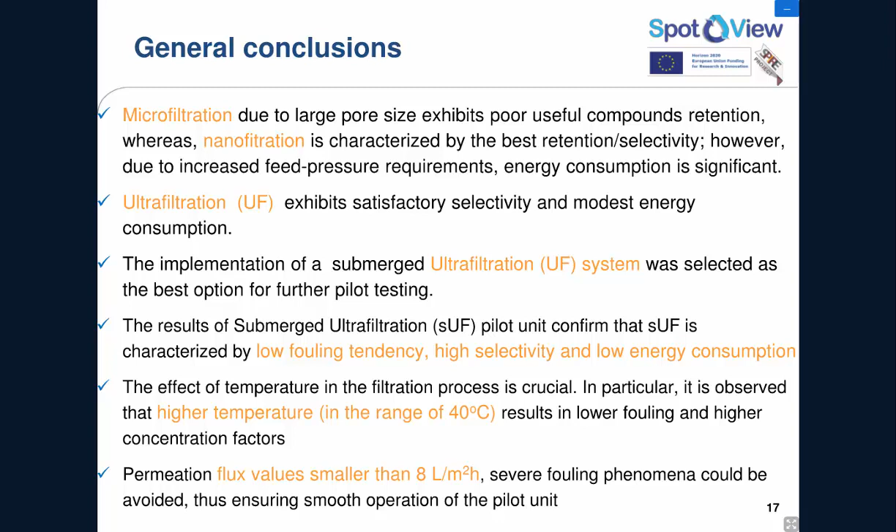Then we will go on with our very last presentation for today. Daniel Winter from the Fraunhofer Institute for Solar Energy Systems is presenting today the results, or probably some results, of the ReWaCEM project. As I said before, ReWaCEM is an abbreviation of recovery of acids and metals from pickling solutions of the metal processing industry. And as I said before, they were together with Inspire Water and SpotView in the SPIRE call, Water Management in Process Industry. So I'm really curious about what you have to present today, Daniel.

Hello and welcome everyone. I hope you can hear me. Yes, we can. Okay, great.

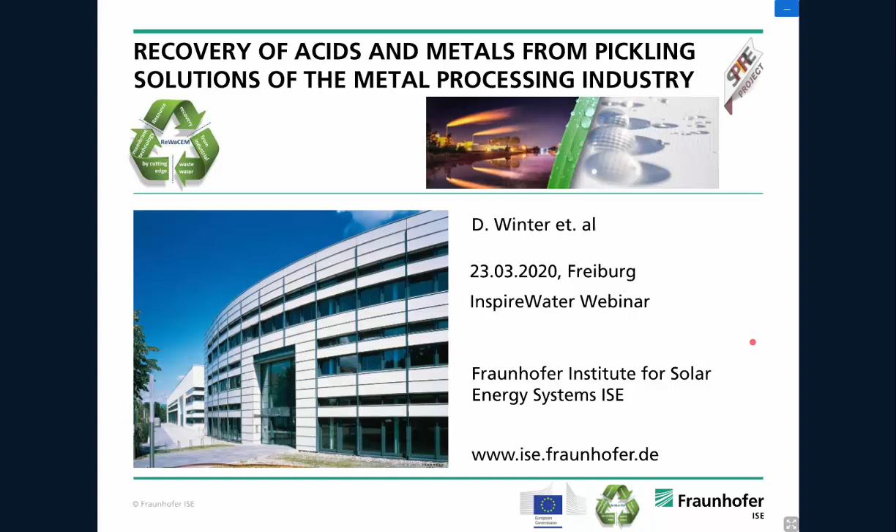So I'm going to start with the presentation, or let's say a small look into the project ReWaCEM, which we have done with a lot of project partners during the last 3.5 years, and we ended the project in 2019. I will just give a short introduction into the basic objective of the ReWaCEM project and share the consortium. I will then go through the different demonstration cases we had a look at during the project. I will select one and give a bit more detailed insight into it, and then summarize some outcome.

So going quickly over the consortium, we had 6 R&D institutes doing the research and the evaluation, and each of the institutes was linked to one of the showcases or one of the core technologies. Then there were 4 SMEs developing the core technologies, and 4 industry partners actually hosting the application of the showcases in their industrial sites.

The overall objective of the project is to reduce the freshwater demand in the metal processing industry, to also reduce the demand of makeup acids which are consumed in large quantities in these industries, to reduce the amount of disposed water, and to reduce the amount of valuable metals that are disposed within these water streams, by applying membrane separation technologies such as diffusion dialysis, membrane distillation, and advanced filtration.

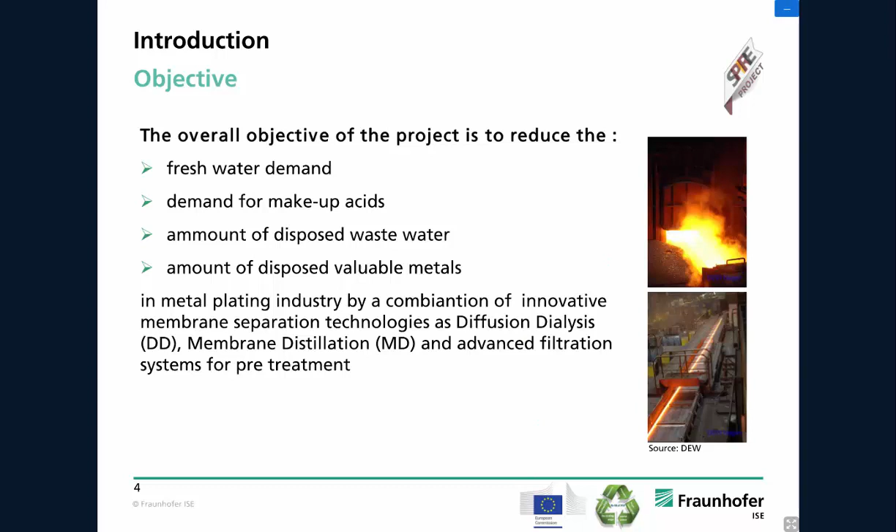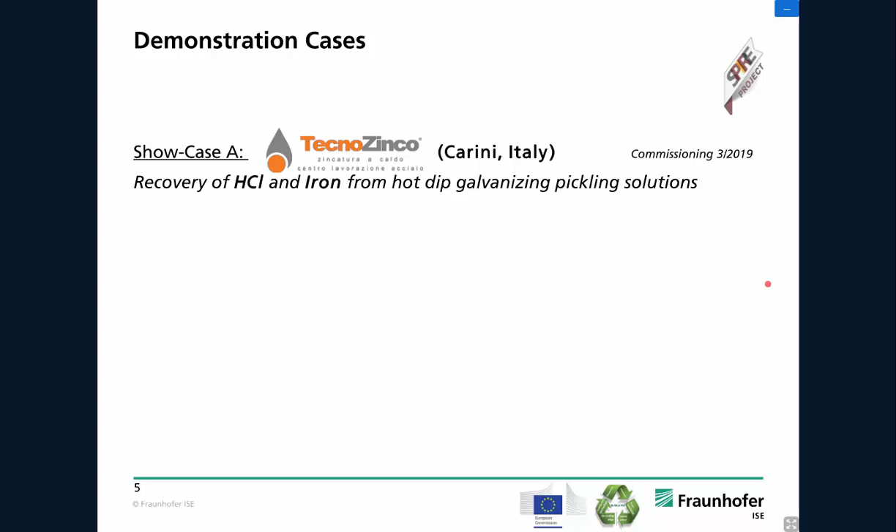Going through the different showcase scenarios we demonstrated within the project. The first one was the recovery of hydrochloric acid and iron from a hot dip galvanization plant in southern Italy, in Sicily, at the company Tecnozinco, and this plant was commissioned in March 2019. The second showcase was the recovery of sulfuric acid and copper from electroplating pickling solutions in an electroplating plant in northern Spain, in Gijón, and this plant was commissioned in April 2019.

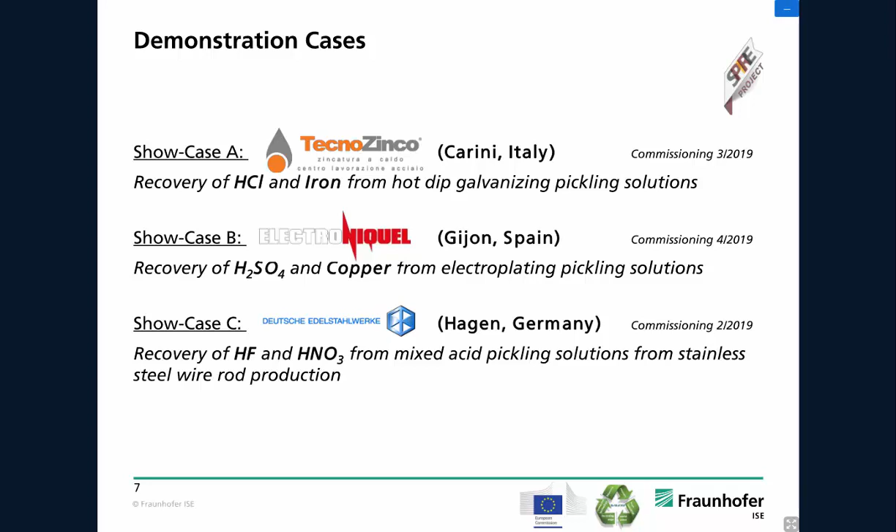The third case is the recovery of mixed acid containing hydrofluoric acid and nitric acid from pickling solutions from stainless steel wire rod production in Germany, in Hagen, at the company Deutsche Edelstahlwerke, and this plant was commissioned in February 2019. And the last case is addressing a bit of a different type of industry here.

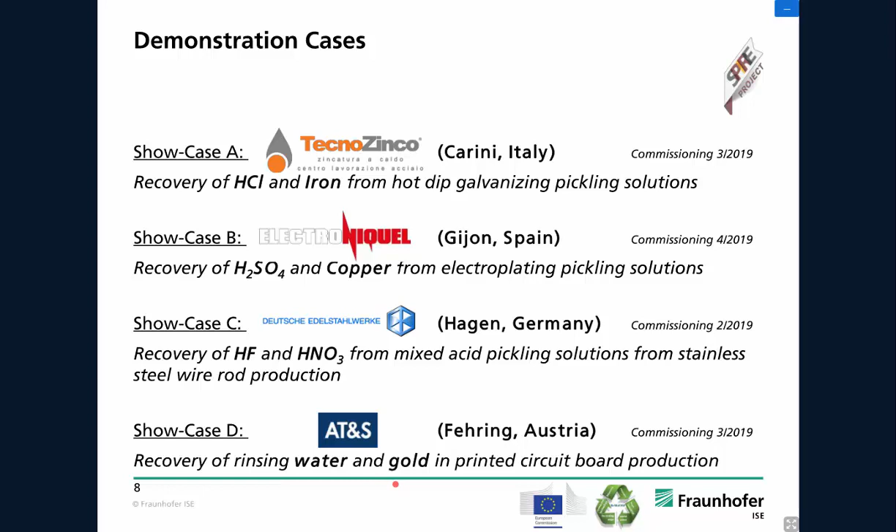It's the printed circuit board production, and the gold in the gold plating processes applied to plate specific parts of the printed circuit board. There is quite high value in these waters, so the recovery and optimization of the rinsing steps is very crucial here, and this was demonstrated at AT&S in Fehring, Austria, and this plant was commissioned in March 2019.

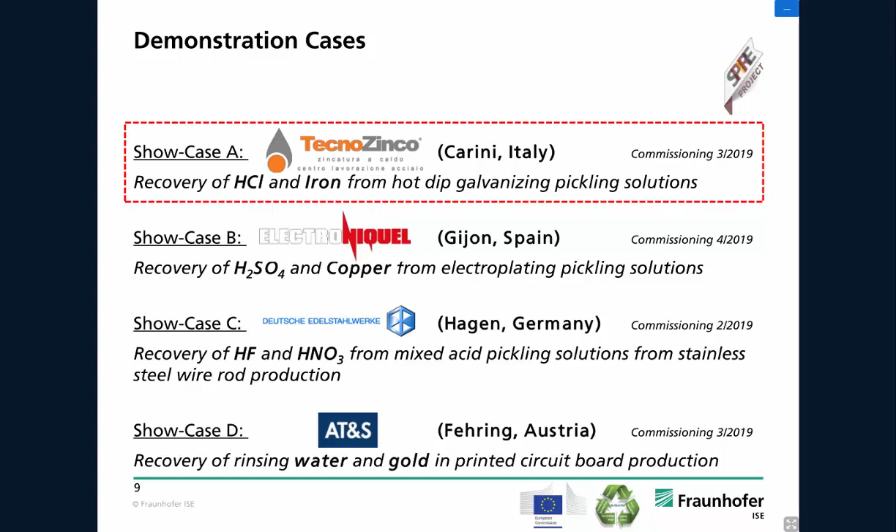All of these cases are, let's say, linked in one way, but address a bit different issues. So I wanted to give a bit more insight into one, and I selected the hot dip galvanizing plant in Italy. To give some information about the pickling process itself, the pickling is basically a surface pre-treatment step by reactive chemical etching to remove oxide layers and form some kind of surface texture on the metal pieces.

So in hot dip galvanizing, there are different process steps, typically starting with a degreasing step, then the pickling itself to remove these layers, then the leftover of the pickling solution is rinsed in rinsing baths, then the pieces are dried and preheated, and then the galvanizing itself, the coating step, happens, which is the core process, and then the pieces are cooled down and pass a quality control.

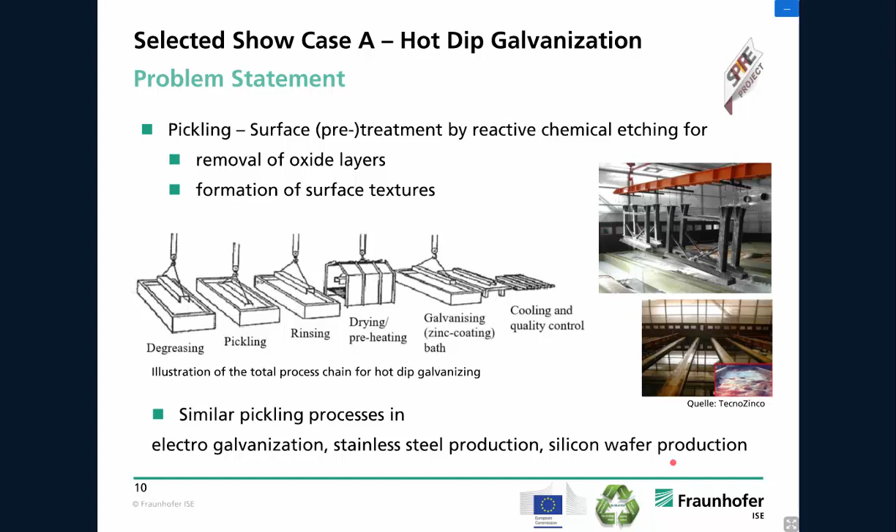And very similar types of process chains are also applied in electrogalvanization and stainless steel production. That's why this showcase is also selected in the project, to show the variety of the application of the technology. But it's also applied in, for example, silicon wafer production.

In the pickling bath, there's basically one problem. The acids are obviously consumed by the pickling process, and this consumption leads to the fact that reaction products and particles are expelled into the bath. So a continuous or batch-wise recovery of this bath is necessary. And if we dispose of these parts of the bath, in these disposed solutions there is still a lot of free acid next to the reaction products we need to dump somehow or treat.

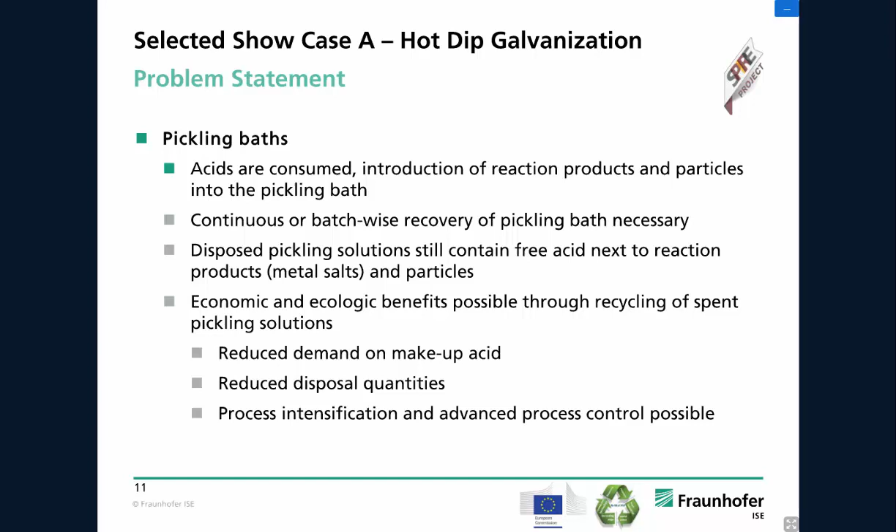So there's quite a high economic and ecologic motivation to recycle these spent liquors, to reduce the demand of makeup acid and the disposal quantities, and also to intensify the process, so we can have a quite nice way to control these pickling processes and the qualities in the bath, which can then lead to process intensification.

To give a bit of an idea of the process we applied here in this hot dip galvanization plant, the approach was a zero liquid discharge approach, including recycling of acids and metals. So we start from here. This is basically the core process, the core pickling process. And here we have the waste stream that needs to be frequently disposed.

And instead of disposing the stream, we feed it to the recovery plant, the ReWaCEM plant, first into a diffusion dialysis membrane stack, which is operated with water as a draw solution, and the membrane itself lets pass the free acid, but has a retention to the metal salts.

So basically the free acid passes to the second side of the membrane and is then fed to a second membrane process, which is a membrane distillation process driven by waste heat from the plant. And in this membrane distillation process, we extract some of the water from the clean acid stream, to push the concentration to the one we need to directly feed it back to the bath.

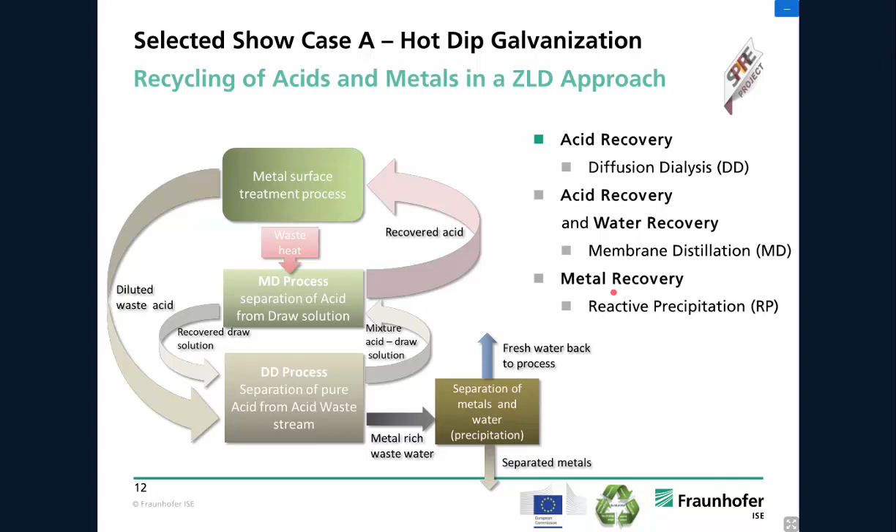So it's three core technologies. It's the acid recovery done by the diffusion dialysis. I'm sorry, here this should be acid concentration and water recovery in the membrane distillation, and the metal recovery in the precipitator.

So here we can see a picture where the demonstration plant arrived at the industrial site in Sicily. And again, here you can see a rough schematic of the hydraulic layout. In the pickling tank, we have 100 grams per liter concentration of free acid and about 265 grams per liter of iron chloride, which is the reaction product and can therefore be more or less considered as the consumed acid.

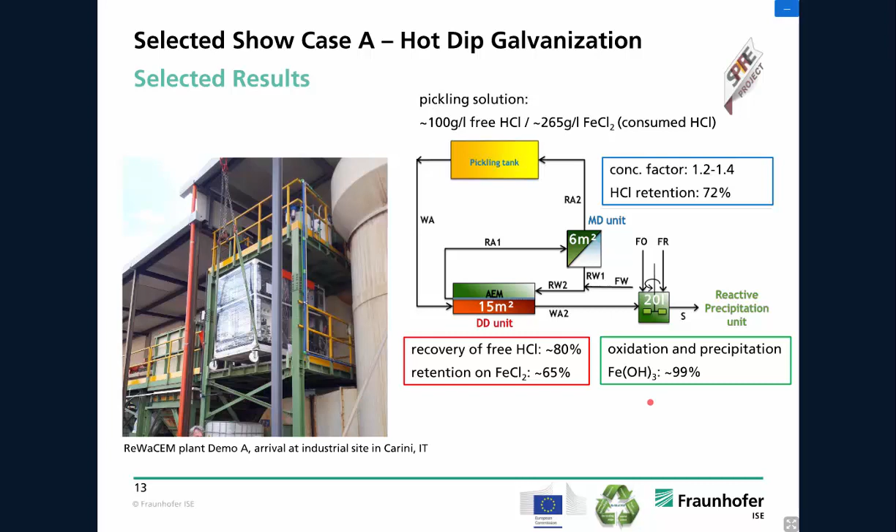And here in the diffusion dialysis membrane, which is 15 square meters in surface, the recovery worked quite well and recovered more than 80% of the free acid, and then concentrated it in a membrane distillation unit, which was a 6 square meter unit, by 20 to 40%, a concentration factor of 1.2 to 1.4. And the metal-rich brine was then fed to the reactor, and almost all of the metal salts could be precipitated here, and this actually worked quite well, also in an industrial scale and automated mode.

So I want to already summarize. Within the ReWaCEM project, 4 industrial scale demonstrators for waste acid, metal and rinsing water recovery were successfully designed and built. Here we can see a bigger picture of the technology. The capacities of the different demonstrators range from 10 to 100 liters per hour treatment. The diffusion dialysis membrane stacks were between 10 and 70 square meters. The membrane distillation stacks between 6.5 and 25 square meters. The reactor, this one here, was about 20 liters.

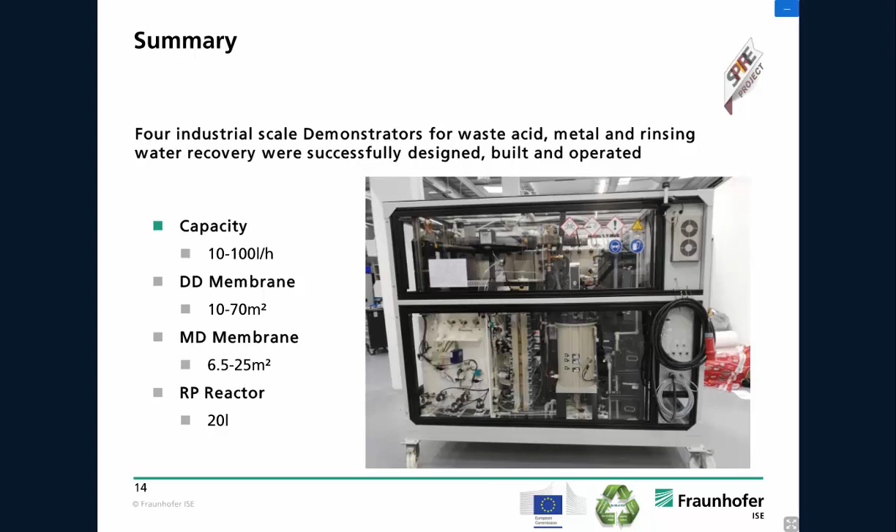The results were rated by applying life cycle analysis and water footprint methods, which the partners in Stuttgart contributed, and showed positive ecologic impact on various impact categories. In the diffusion dialysis itself, we observed very high recovery rates from 80 to 90% in all the different treated acid systems, so also in the sulfuric and the mixed acid case.

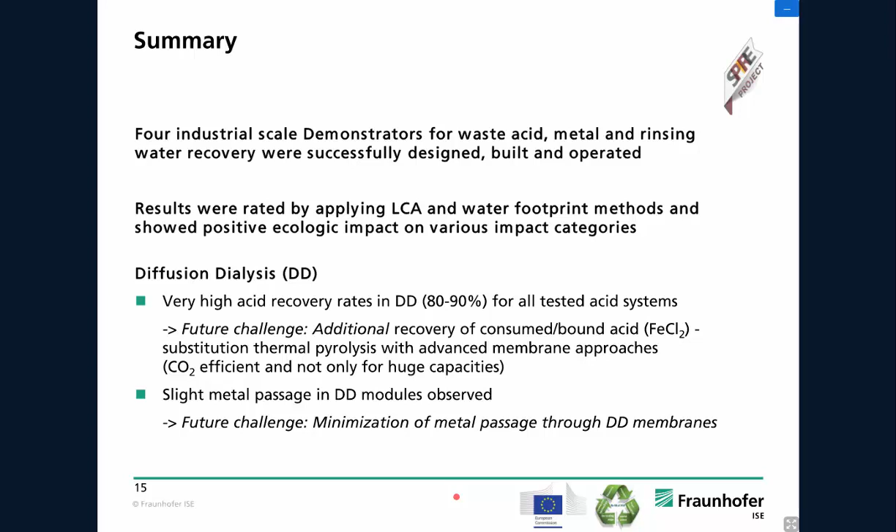As a future challenge, it can be said that additional recovery of the consumed, so the chemically bound acid, is the next step, and these days this is typically done by very huge thermal pyrolysis plants, which are only capable for very big plants and very huge capacities and gas fired, so that would be something for future developments. Then in the diffusion dialysis itself, we observed a slight metal passage, so the minimization of this metal passage would also be a future challenge.

For my last slide here, talking about the membrane distillation, a new concept for hazardous media treatment was developed, because application scale membrane distillation systems typically address drinking water production or inorganic salt concentration, but not so much fluoric acid treatment or something like that. The waste heat is and should be applied to achieve economic feasibility, and the acid concentration and rinsing water recovery works fine, but we need to be aware that volatile acid compounds pass these porous membranes. So a future challenge is to optimize the concentration concept specifically for volatile acids.

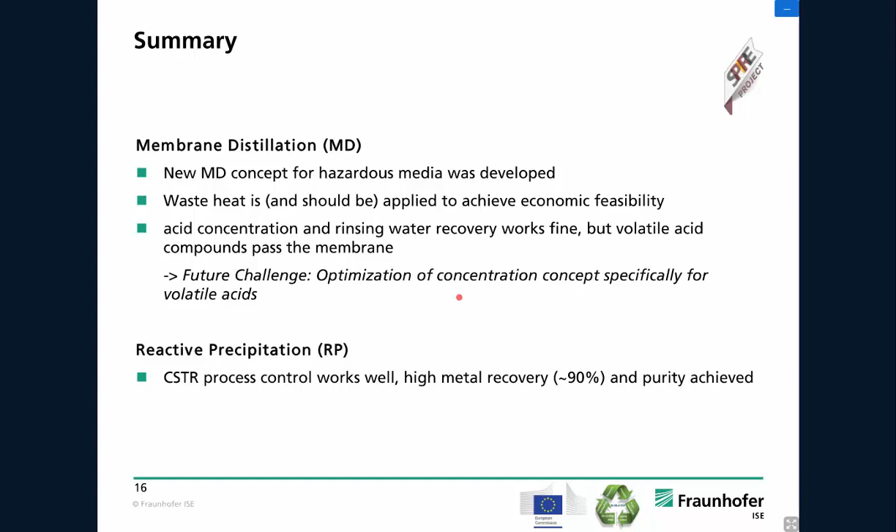In the reactive precipitation part of the technology, the process control worked very well, and we could recover a very high amount of these metal salts and achieve very good purities here.